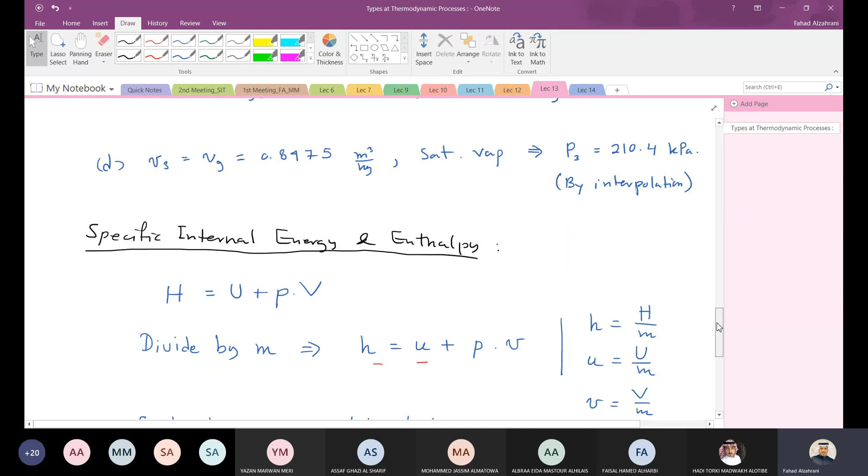Last time, Shabab, we were talking about a few examples. We talked about the different processes, and then we took an example for a constant volume process.

Then we started talking about internal energy and enthalpy. We said the specific internal energy and the specific enthalpy are very similar to other properties, so they are properties, they are tabulated. All different phases and states also have corresponding internal energy and enthalpy at specific temperature and pressure.

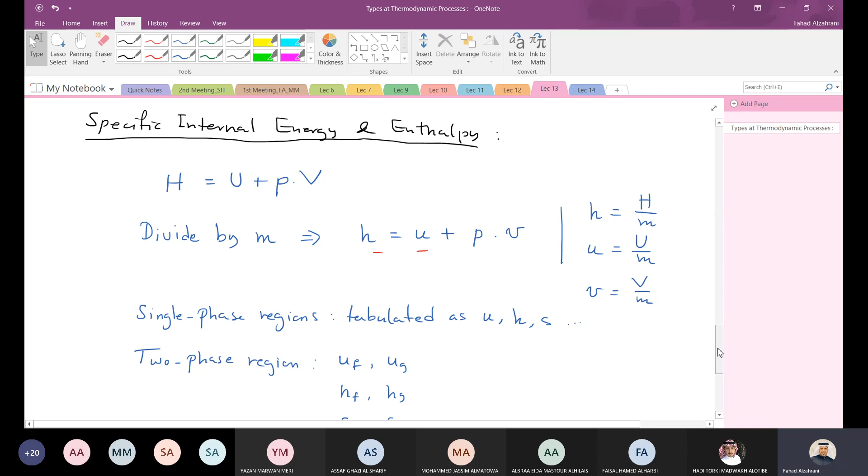H is defined as U plus PV, and all the three tables have, as I said, tabulated U and H. You have UF, UG, HF, HG, etc. You can use equations like UF plus X times UG minus UF, etc. for the saturated mixture property.

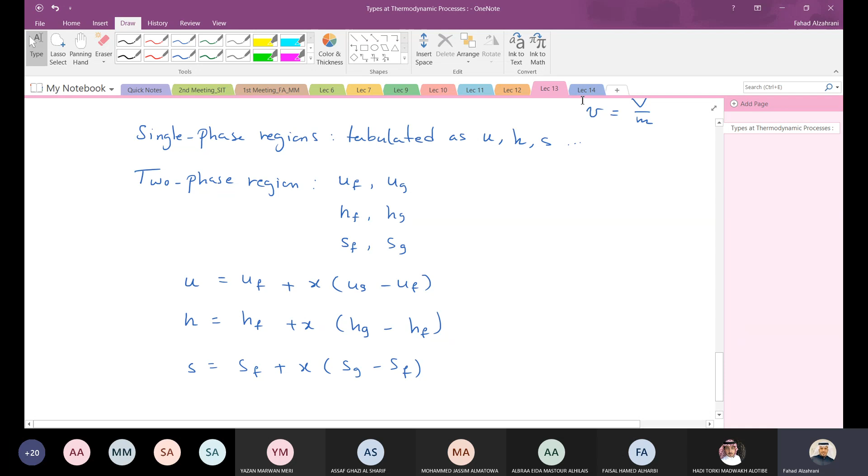Today, Shabab, we'll talk about additional properties. Maybe you have seen it before, which is called the specific heat or the heat capacity.

Do you remember, Shabab, heat capacity? Do you know what's the heat capacity? It's the amount of heat the matter can absorb. What else? Who else can say something about it?

It is the energy required for every 1 kilogram to raise it 1 Celsius. Okay, it's actually 1 gram, I think, not kilogram, but this is correct. So it's the amount of heat required to raise 1 gram of substance 1 degree Celsius.

But how can we think about this physically? The other way you can think about heat capacity, as one of you mentioned, is the ability of the substance to absorb heat or release heat. For example, if I have water here versus oil, this is just an example.

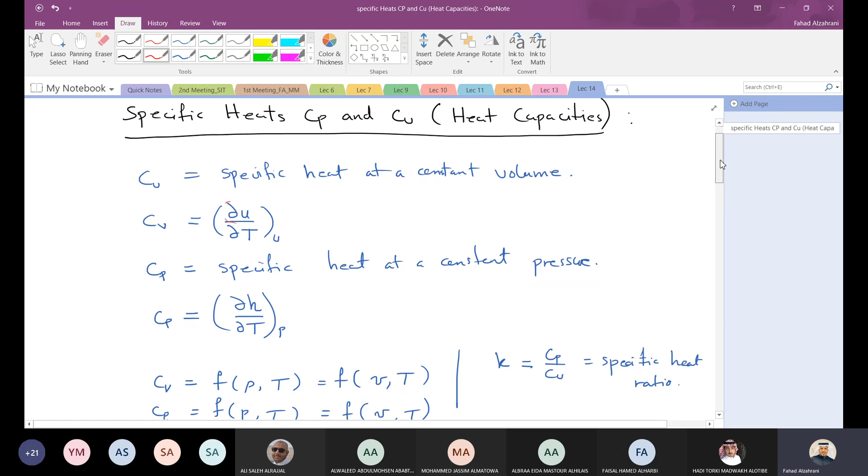There is also another property which we call K. What is K? We call it the specific heat ratio. The specific heat ratio is simply Cp over Cv. When you divide the specific heat at constant pressure by the specific heat at constant volume, you get what we call the specific heat ratio, or K.

So why do we use this K? Because sometimes it's easier in the analysis, it makes our analysis simpler. So that's why we have this property K. This is one more piece of information for you - the specific heat ratio.

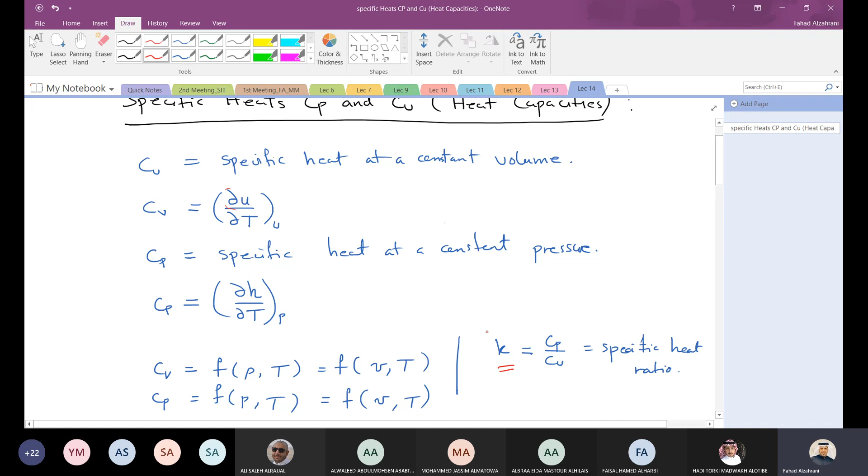Is this what you meant? Yes. So what did we say - based on two independent properties I can find any property, right? So the CV, as I said, since U is a function of any two independent properties, I can rewrite CV and CP as a function of any two of these independent properties. So it is a function of pressure and temperature, maybe temperature and specific volume, maybe pressure and specific volume. So any two independent properties, I can find the third property. That's why I write it like this: function of pressure and temperature, or specific volume and temperature. Based on any of these two independent properties, I can find the specific heat.

Any other question? More questions? Okay, it's good.

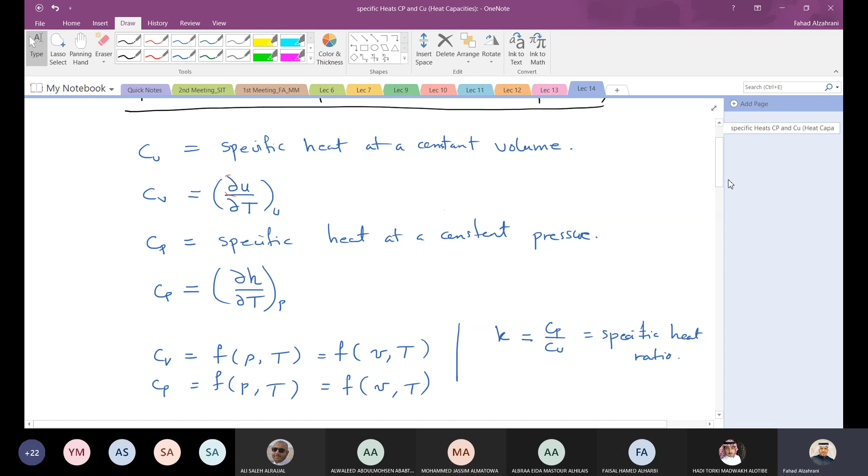So these are ways to approximate properties for liquids and solids, and this is what we're going to talk about today. We'll talk mainly about two approximations. First, for liquids, we approximate properties if they don't have data. The other way is to approximate liquids and solids if we have constant specific volume or constant density. This approximation is called the incompressible substance model.

Incompressible, what does that mean? It means not capable of being compressed, as if we're saying our density or specific volume is not changing. The pressure is not high enough to lead to a change in specific volume or density, so we can approximate the substance as incompressible. What's the result of this? We'll talk about it later. The result is that the properties will only depend on temperature.

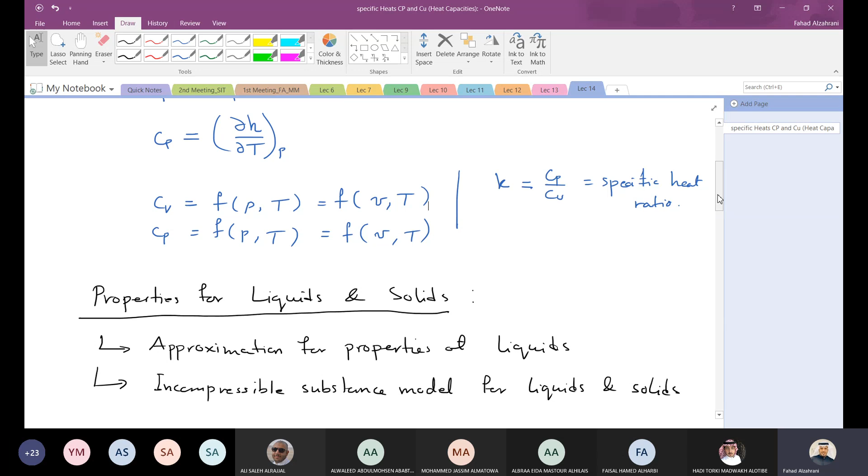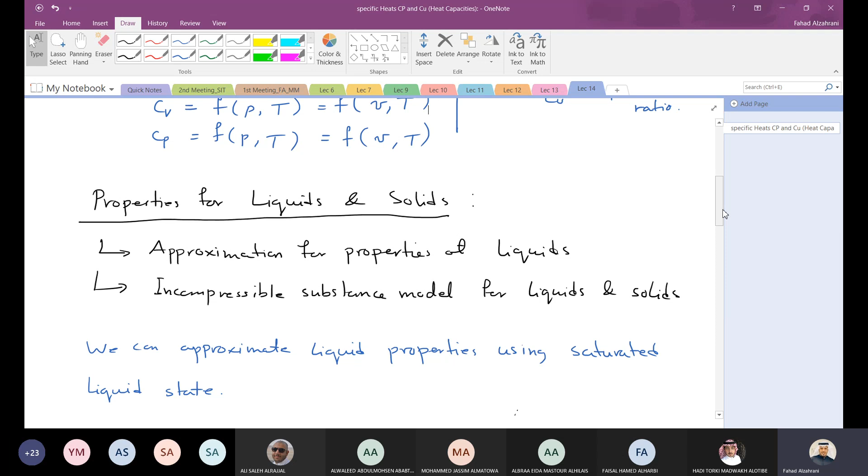So let us start with the first approximation for liquids. As I said, we can approximate liquid properties using the saturated liquid properties. Let me actually start a new sheet for clarity.

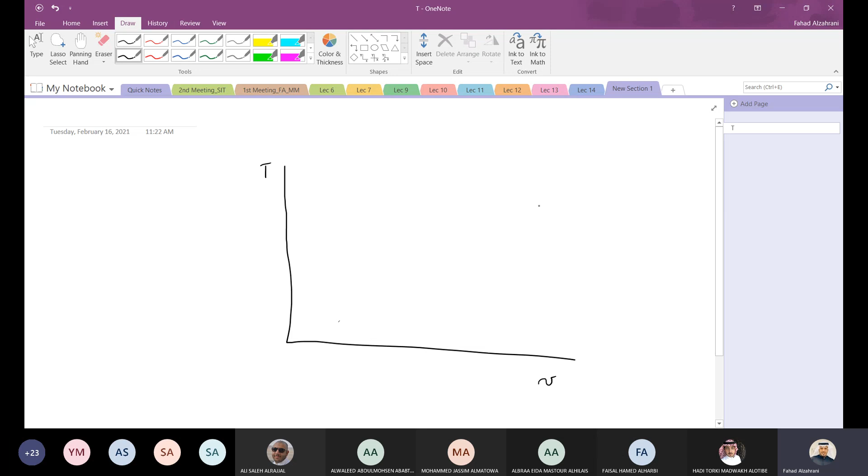So I'm going to plot here. Let's say this is my T-v diagram. This is my dome. Let me plot the constant pressure line like this.

Let's say, imagine I gave you a question and said this temperature is T1 and this pressure is P1. Let's say this is P1 here and this is T1. So you check the tables and find that this is a compressed liquid state. But you don't have a compressed liquid table, you don't have it.

What can you do? If you look at this, usually when we look at compressed liquid properties with this pressure table, you'll see that the F state here, which is the saturated liquid point, is very close to this constant pressure line. So this is my VF now, and this is my actual V, the actual specific volume where the data point is. But you don't have the compressed liquid table for this substance.

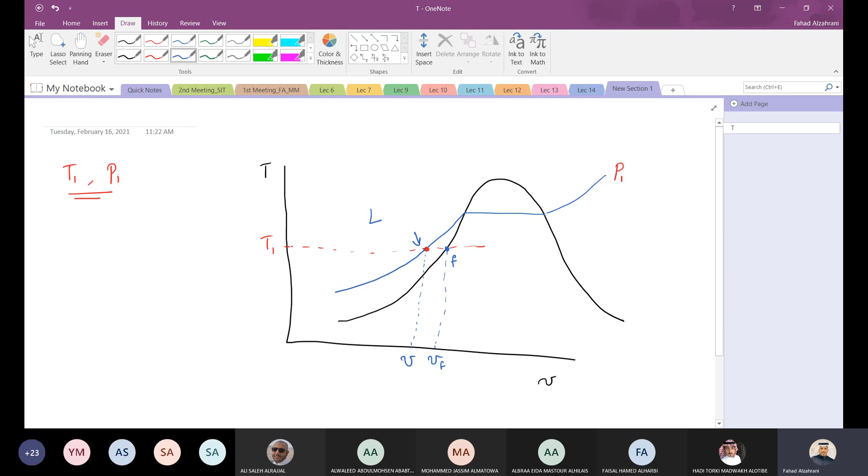So what do you do? You look and say, oh, the F value is close here, this one is very close. So my actual specific volume, as a function of temperature and pressure, is approximated by my VF here. This one is close to VF at the given temperature, which is T1 in this case. So if you take this temperature T1 and take the F value, the property at the saturated liquid state, this will be a good approximation for the actual liquid properties.

Focus: you need to take saturated liquid data at the given temperature, not the pressure at the given temperature, because if you change the pressure like that, taking a different pressure, the value might be different than what you need. So you take the same value at the temperature.

Is this correct, or are you just making this up? How can we make sure? Let's look at the tables, for example, to make sure what I'm saying is right or wrong. So let's go to the tables, let me share them with you.

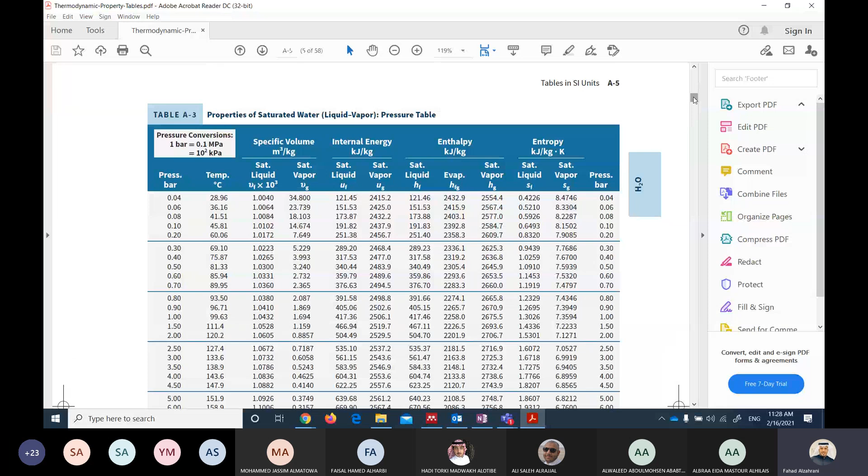ممتاز. طيب افرض انه ما عندي تيبل هذا، فكيف اسوي approximation؟ انا عرفت انه based on this temperature and pressure, this is a compressed liquid state. However, I don't have compressed liquid table, so I can go to the saturated mixture table. Don't go to the pressure table, go to the temperature table and go to 80 degrees Celsius. كم ال specific volume؟

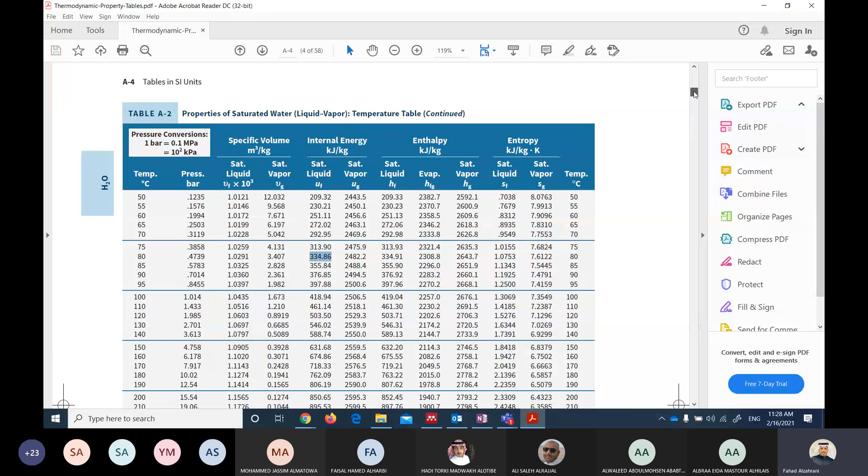1.029 which is very close to 1.028. مو بس يا شباب specific volume، تخيلوا اليو هنا، اليو كم؟ اليو 334.86 كيلو جول في الكيلوغرام at 80 degrees Celsius. خلونا نروح الكمبريس ليكويد نرجع له.

هذا الكمبريس ليكويد كم اليو؟ 334.29. هذه كانت 0.86، هذا 29. You see it's very close.

خلونا يا شباب نغير البريشر but let's keep looking at 80 degrees Celsius. Let's go to 75 bar at 80 degrees. كم اليو؟ 333.15 which is still very close to 334. You get the point يا شباب.

Even if I have multiple pressures at the compressed liquid table, however, the temperature at the same temperature data are very close to the saturated liquid. Okay, the data or the properties are comparable to the saturated liquid property. So that's why if I want to approximate compressed liquid data, I can go to the saturated liquid data at the same given temperature and take the property.

وضحت يا من لسان الوليد اتوقع ولا؟ وضحت دكتور، بس معليش، طب والبريشر؟ يعني لو شفنا ايش في البريشر البريشر؟ هذا، ايش في البريشر؟ يعني فرض يا دكتور انت اعطيتني 25 بار، لو رحت عند التيبل حق البريشر ما راح يطلع نفسه؟

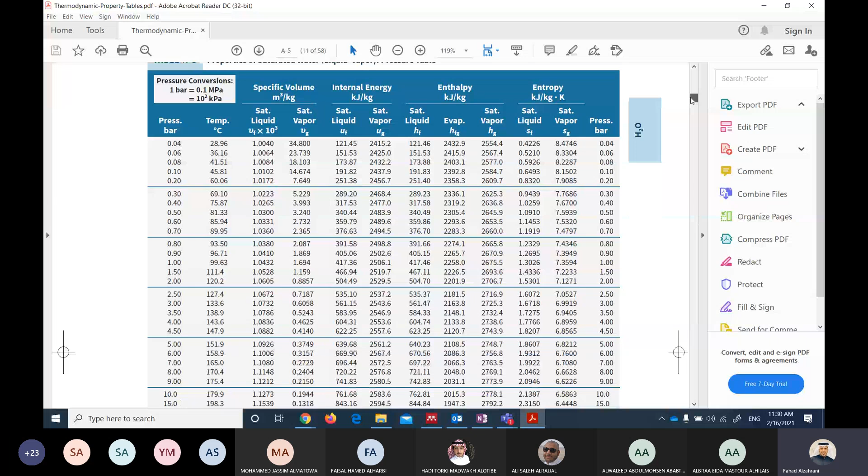لا، خلنا نروح عند البريشر تيبل، خلنا نروح 25 بار عشان تفهم ليش انا قلت لك البريشر از نوت رايت. الحين هذا البريشر تيبل، نروح عند 25 بار. كم اليو؟ شوف اليو 95، شوف الفي 1.1.

الفكرة مو في البريشر، قلت لك if I come back here, this is constant pressure line, this is pressure 1 is constant, and I'm comparing ايش؟ this interval is close for the temperature only. يعني this is closed, data are close for the same temperature at the given، فهمت علي؟ at the given temperature the data are comparable. لما تتكلم عن pressure ثاني انت تتكلم عن ايش؟ انت تتكلم عن هنا let's say P2 is a different pressure, totally different pressure. حلو؟ فالتوتالي different pressure، فانك انت كانك compare ايش؟ compare

خلينا نقول let's see how can we, yes, for example this point, connect, compare this point with this point. okay, which is far. يعني it's far, it's not close. So we're talking about here يعني ال approximation حقنا ليش؟ لأنه ال constant pressure line is very close to the saturated liquid line. That's the idea.

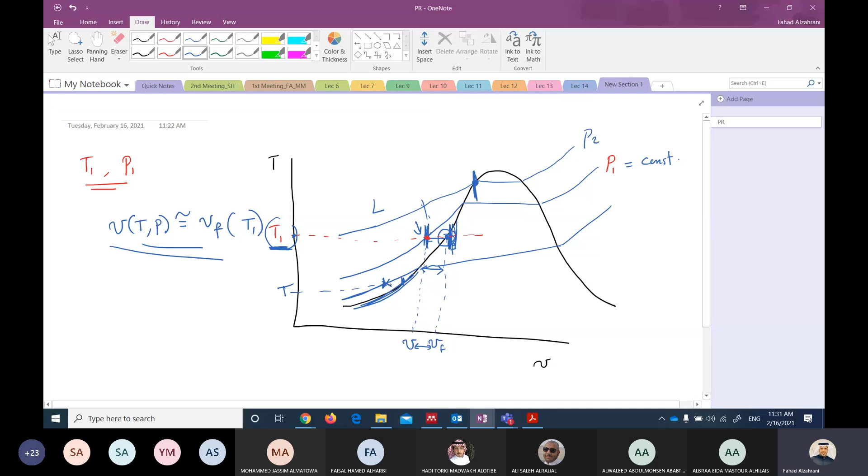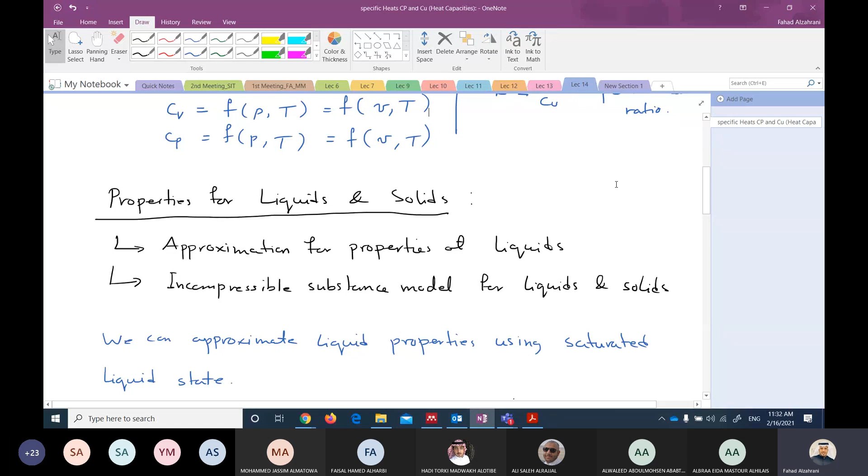Okay, that's why when you cross okay. here, yeah, when you pick the same temperature, these 2 points are close. That's why it's approximation at only the temperature, not the pressure. يعطيك العافية دكتور. الله يعلمك. أي سؤال ثاني؟ وضحت هنا؟

طيب يا دكتور، Yes. إذا كان مثلا at constant temperature وكان بين مثلا قيمة موجودة at 25 بار وقيمة موجودة at 75 بار، اوكي. كيف بطلع البريشر حقه؟ دقيقة، سؤالك له علاقة بالابروكسيميشن ولا ما له علاقة؟

تتكلم عن الابروكسيميشن، تتكلم عن عندي نقطة وبسوي لها انتربوليشن يعني. احنا نتكلم الابروكسيميشن هذا، نتكلم انه ما عندك الكمبريست ليكويد تيبل، يعني التيبل اللي وريتك اياه هذا ما هو موجود، مو عندي. يعني خلينا نرجع هنا اوريك مثال.

لو تروح هذا شوف الريفريجرنت 134A، عندي بس saturated mixture temperature table pressure table، عندي superheated فقط، ما عندي compressed refrigerant. فلو عندك داتا اعطيتك temperature وبريشر حقت refrigerant وطلع لكم انه compressed liquid، فما يهمني وش البريشر، خلاص اروح عند الساتوريتد ميكتشر تيبل عند التمبريتشر واخذ البروبرتيز واقول انه هذه its approximation for that liquid.

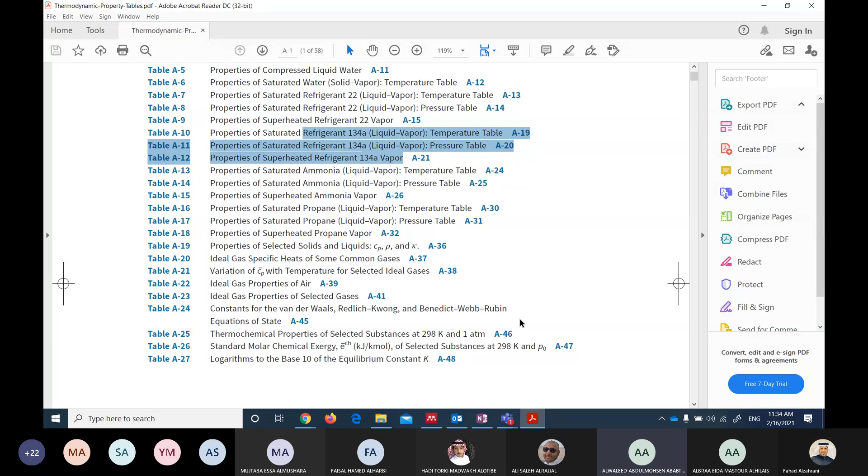انا لاحظت برضو من قبل انه حتى اللي تحت يبدا يبتعد شوي، فلو فرضنا ان التمبريتشر از لو. شوف هو في رينج معين you might start deviating from the value. اوكي، يعني في رينج معين للتمبريتشر يكون الفاليوز تبدا تصير اكبر.

فيو ار رايت انه ممكن at a specific range، بس you need to define this range and يعني this is outside of the scope، يعني this is not what we are talking about. For now you can approximate any liquid with the saturated liquid, but at certain points, maybe at certain temperature range, okay, you might have actually a little bit further points. And we can try to experiment ourselves now.

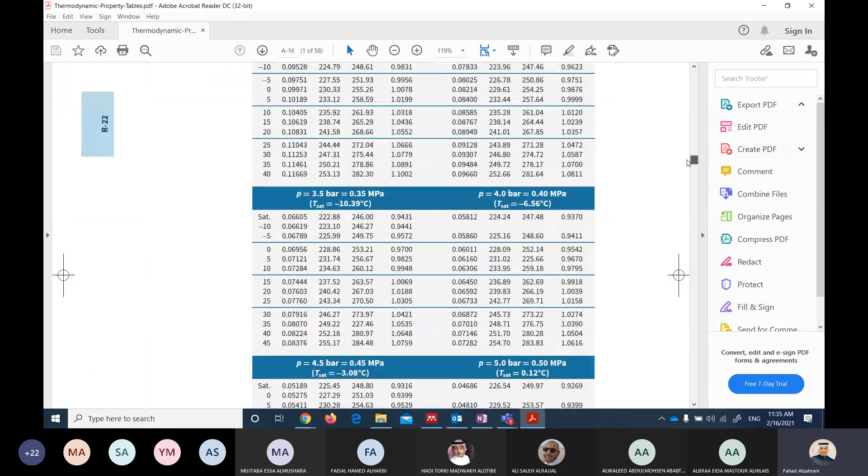Let's go to the water table and experiment. Let's go to low temperatures. خلينا نشوف. هذا refrigerant. Let's go to low temperatures and check.

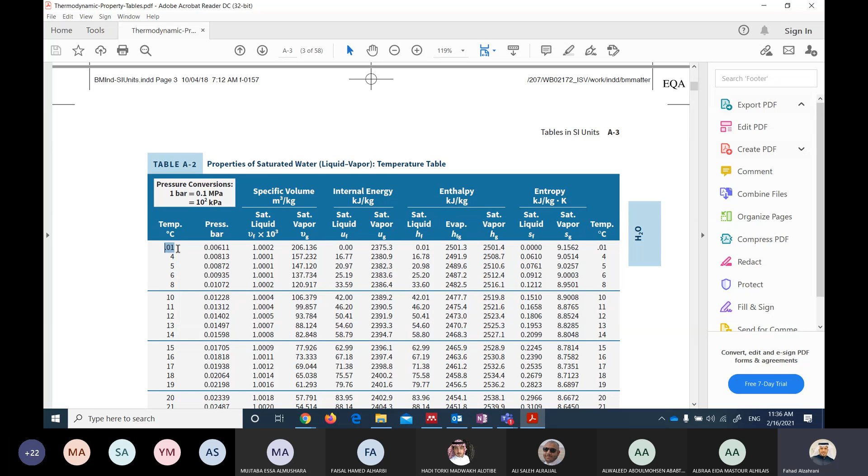This is superheated. Okay, let's say this is the temperature table. Let's take the lowest point here, for example. I don't know if that's available in the compressed liquid. Let's go to compressed liquid to check what's the lowest point there.

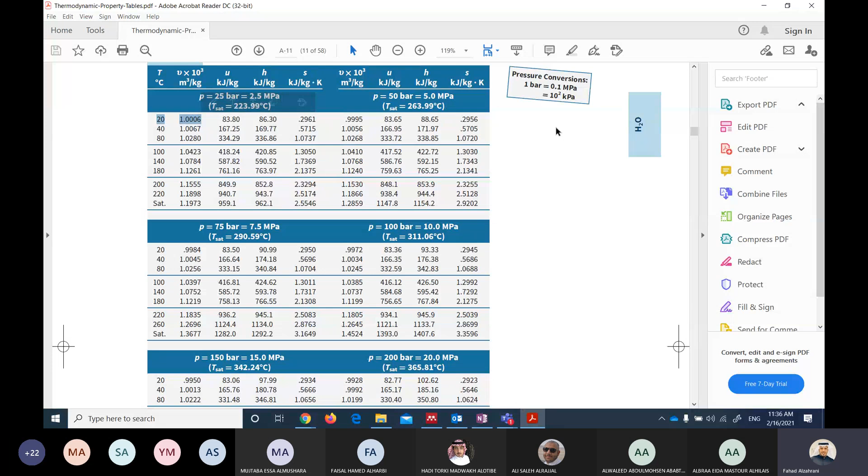It's overheated, this is compressed liquid water. The minimum here was 20 degrees. So 20 degrees is 1.000, and let's say U is 83.

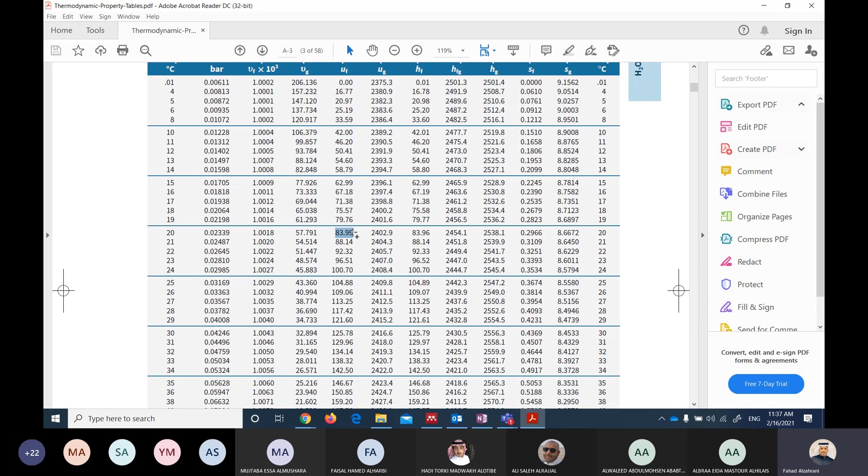So let's go to the saturated mixture table, temperature table. Let's go to 20 degrees. 20 degrees here, 1.00, and this is 83. It's still close, still close. We're still in the approximation limit or range. Maybe if you go to lower temperatures, you have more deviation, maybe. But for now it's still a good approximation.

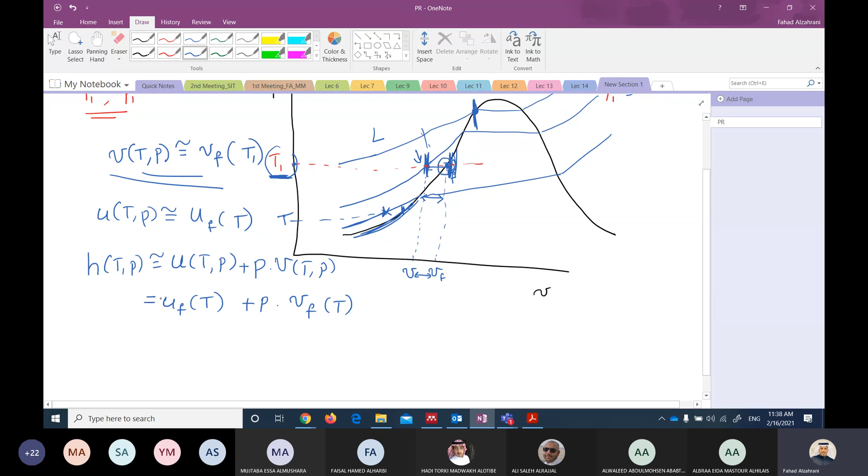So what can I do? How can I rewrite it in terms of HF? You have HF equals UF plus P saturation, this is the saturation state, times VF. So UF I can rewrite it as HF minus P saturation times VF.

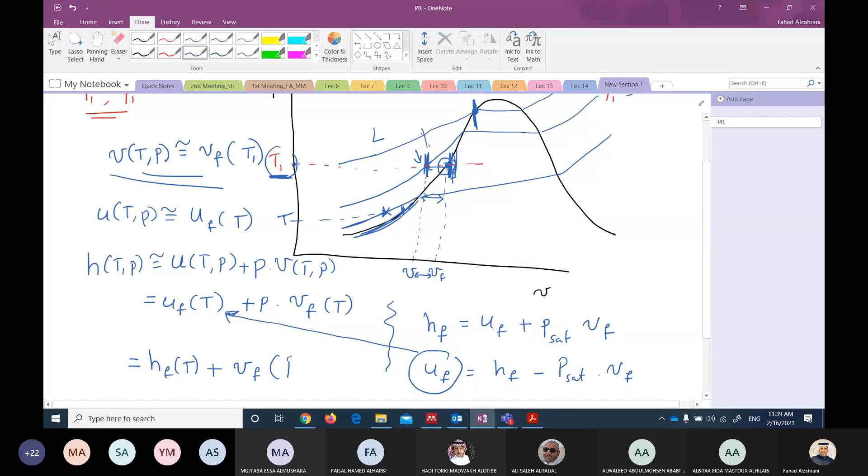So if you take this one and put it here, you end up eventually with H as HF as a function of temperature only, plus VF times (P minus P saturation). So H as a function of temperature and pressure is not approximated only by HF, there is an additional term here.

However, if the given pressure is close to the saturation pressure, or if this term is small, I can neglect it and end up with H approximated as HF. But you must understand that H is not always approximated as HF. It is approximated as HF plus some certain term. If this term is small, then I can approximate it as HF.

If it is not small, meaning if there is a big difference between the saturation pressure at this temperature and the given pressure, then you cannot neglect this term. For example, if I have 100 plus 2, I can just say 100. But if it's 100 plus 50, 50 is significant, so I will add it. So this is how you can approximate the property for the enthalpy for the liquid.

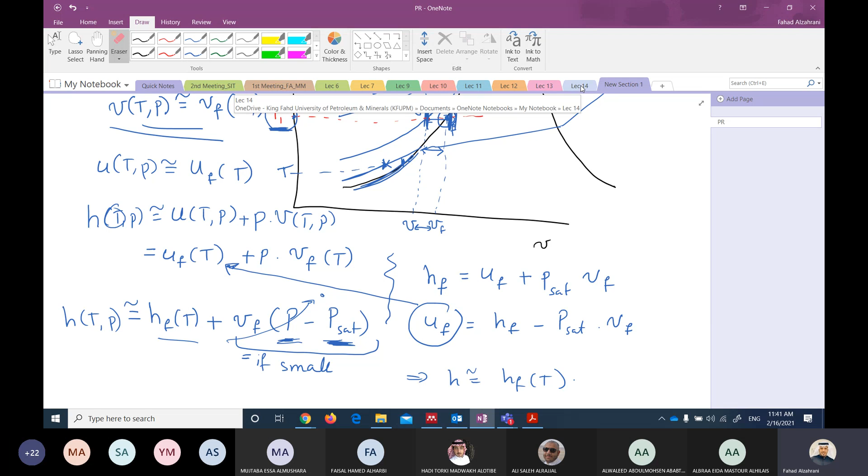Is it clear? Any question here? This is what I wrote here. Okay, excellent.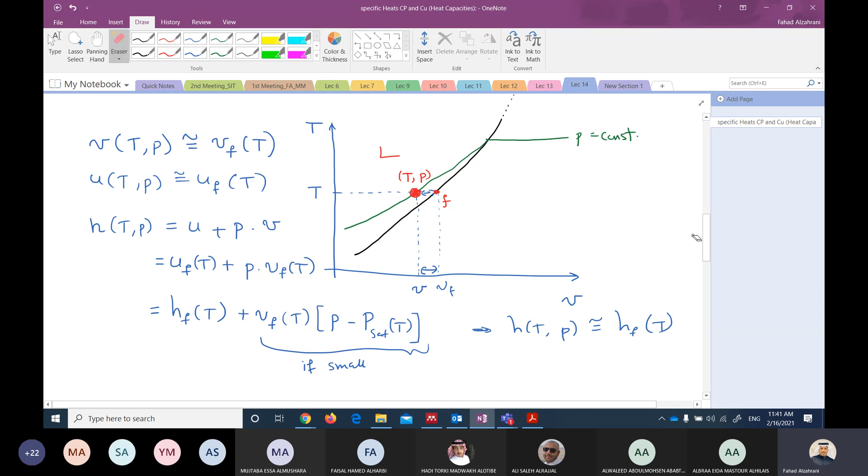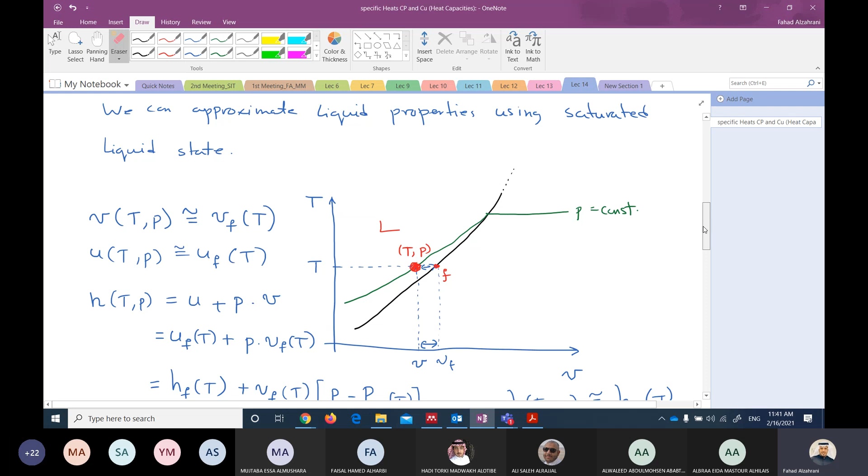So this is the first approximation for liquids: we can approximate liquids with the saturated liquid properties at the given temperature. For the other approximation, as I said, if we have a specific volume or density that is constant during a process, I can approximate this substance to be an incompressible substance.

What's the result of this? The result is that the property now is not a function of temperature and pressure, it's a function of temperature only. We assume that the pressure doesn't affect the properties much, and the properties only depend on the temperature. This is what we call the incompressible substance model. When you hear 'incompressible model', automatically in your mind the density or specific volume is constant, and the properties are a function of temperature. These are the two things you should immediately understand when you hear the word incompressible substance.

So, yes, go ahead. Sorry, but incompressible substance means that...

On the graph it moves vertically up or down. It's as if the volume or density is always constant, so the process is always vertical. The specific volume is constant, the density is constant. Okay, right.

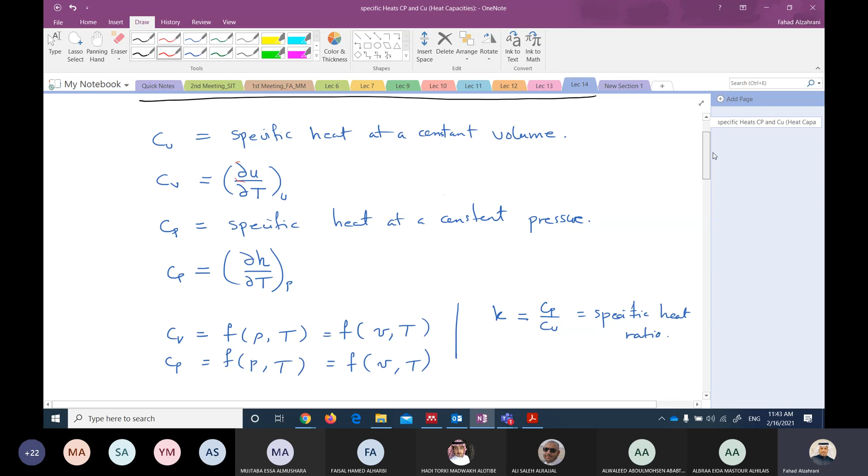What's the result on other properties, like Cv and Cp? Remember Cv is partial U by partial T, and Cp is partial H by partial T. Can we do it for the incompressible model? It will be a little different, because now the properties are a function of temperature only, so it's no longer partial. It becomes du by dt. So Cv will be du by dt, because it's only a function of temperature.

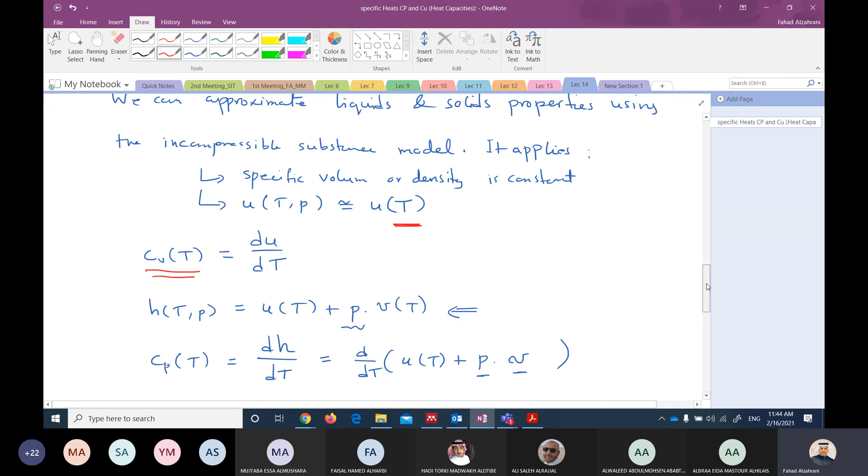What about Cp? As we saw before, Cp is defined as dH by dt. Let's take the definition of H, which is H equals U plus PV, and put it into this derivative. So it becomes d by dt of U plus PV.

What is PV here? We agreed that V, the specific volume, is constant now and doesn't depend on temperature. So this PV term is basically constant, and the derivative of a constant is zero. So we end up with du by dt, similar to Cv. So Cp becomes equal to Cv for the incompressible model.

So for incompressible substance, Cv equals Cp. This applies for the case of incompressible substance, and this approximation is only for liquids and solids. You cannot apply this for gases. We'll talk about gases later.

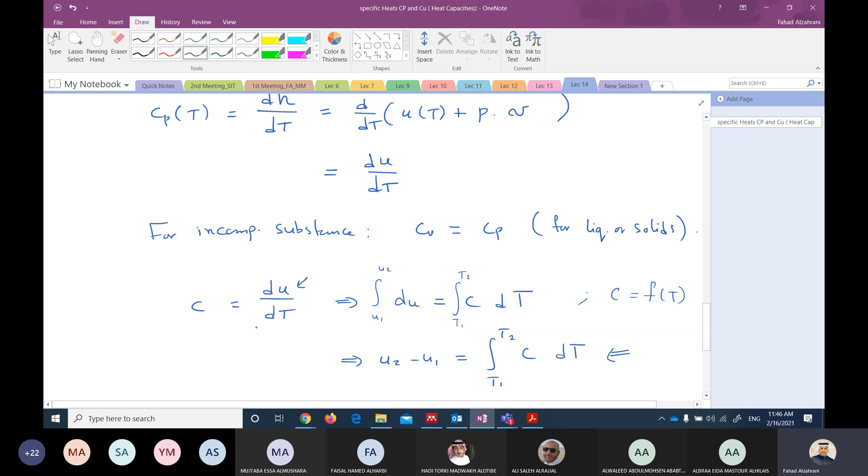So if we want, as I mentioned before, sometimes we can use the specific heat to evaluate the internal energy. How can we do that? We can rewrite the internal energy as du equals C dt. You can integrate from state 1 to state 2, and you end up with delta U, or U2 minus U1, equals the integral from T1 to T2 of C dt.

And C here, as I said, for incompressible substance, is a function of temperature only. We're still talking about incompressible substance. So delta U equals integral of C dt.

What if C is constant? Sometimes the specific heat also doesn't change much with temperature, so it can be approximated as constant during the process. In this case, we take C out as a constant and integrate, ending up with delta U equals C delta T.

Doctor, how does the specific heat not change with temperature? It depends on the condition - on the mass, the volume of the substance, the pressure and temperature. At certain conditions, I can see that my C, the specific heat, is not changing much with temperature, for example, so I can take it as constant. At another temperature range, say very high temperatures, C changes a lot, so I cannot take it as constant. It depends on the temperature range and the conditions.

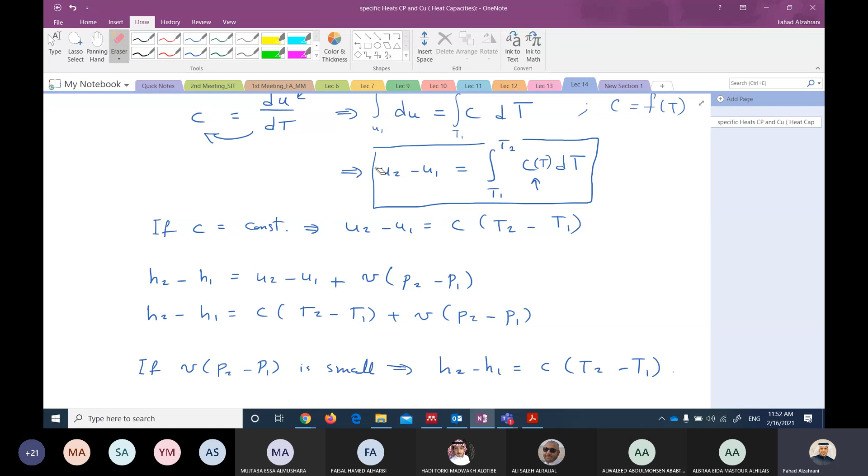But for now we are learning how to evaluate the properties. What does it mean? These are properties.

But the use of these properties, you are right, I agree with you. We are gonna apply these in application. We will go and try to apply it in actual cases, in some analysis.

But where is this analysis? This is gonna be later. When we talk about the first law of thermodynamics, the second law of thermodynamics, you will see all of these. That's the idea. You will need delta H, you will need delta U in the equation for the first law, second law. You will apply it using this method.